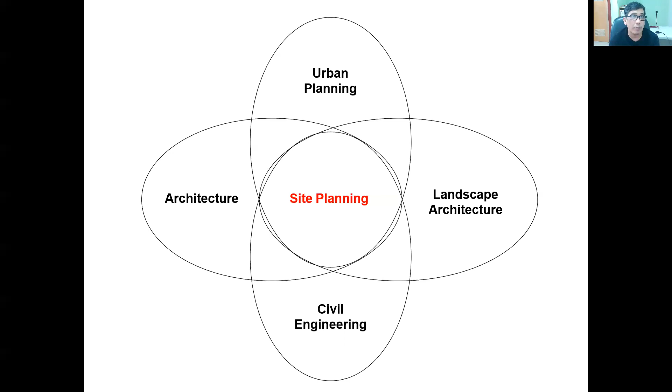So in our subject, we are discussing planning as an introduction, site planning and landscape architecture. We will be discussing a little bit of all of these topics that are shown on the screen. And we will be discussing first the site planning.

Site planning is the art and science of arranging the structures on the land and shaping the spaces between. It's an art of arranging uses of land linked to architecture, engineering, landscape architecture, and city planning. Site plans locate objects and activities in space and time. These plans may concern a small cluster of houses, a single building and its grounds, or something as extensive as a small community built in a single operation.

As you can see, in site planning, most of the time architects or engineers are given an opportunity to develop a vacant land.

One profession that is very involved in site planning is geodetic engineers, along with architects. Architects and geodetic engineers work together in creating large areas to be developed. The geodetic engineers establish the contour, the natural features or characteristics of the land, and the architects plan it according to principles or standards that are applicable for that particular location. Civil engineers do the design of the water, drainage, and electricity layout of a particular site.

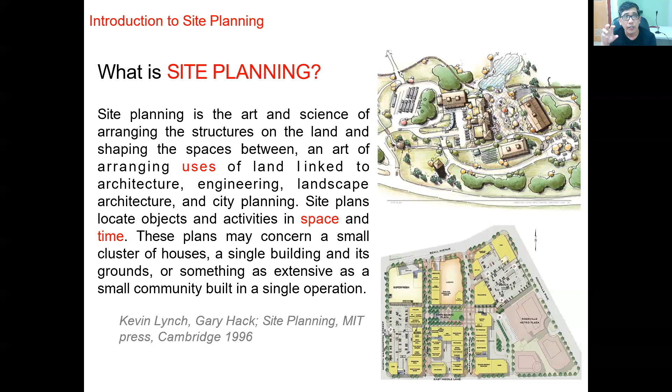A site plan consists of locating the different parts of the land that you will develop. You will show the building, the roads, the parking areas, the pedestrian paths, the natural or man-made features like trees, the landscaping, and where the service area and drop-off for building users will be. You will also show the property line, the orientation, showing the north-east-south-west symbol on the site, and showing the possible contour if you can show it on a site plan.

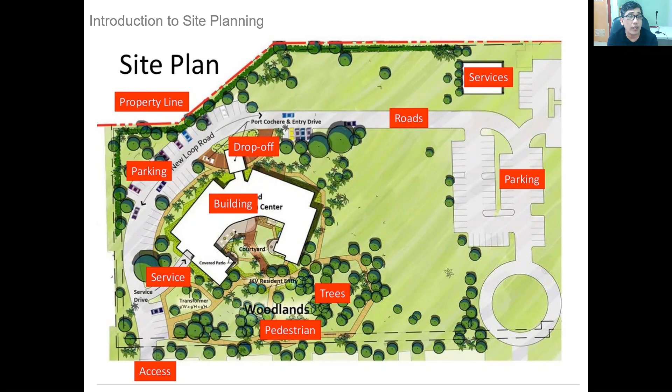In the site plan, some architects also create a site plan showing the ground floor plan. In this ground floor plan, you can see the perimeter of the building showing the immediate hardscape or landscaping around the building, the drop-off, and the parking areas. This is very important in presentation or in conceptualizing the flow of traffic, the flow of pedestrians, and the location of the landscaping on a particular site or building. So in creating a micro plan of each particular building, you can see and show this hardscaping around the building.

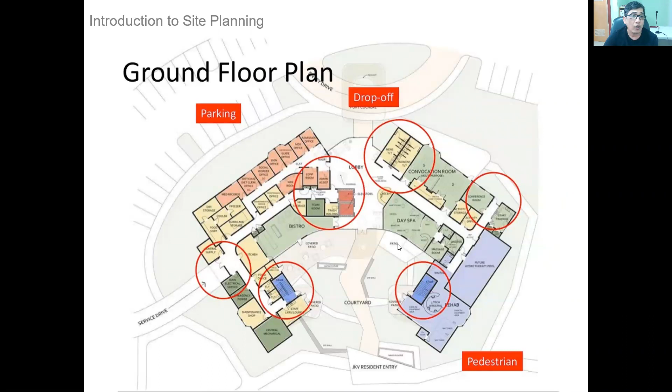On the upper floor, you can also see that the vertical transports are located in the same area, and it affects the configuration of the upper floor layout.

Most of the time when I'm planning a building or structure, I always think of the positioning of the fire exits, stairs, elevators, and ramps in relation to the ground floor up to the upper floors. In creating a plan, you need to orient yourself on where the stairs will be in relation to the site and how it affects the overall plan on the upper floors. So you always think of the three-dimensional massing of the building during the site development plan.

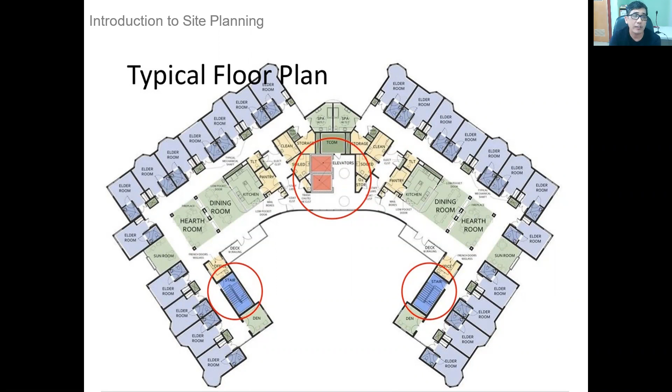This also shows the entrances of the building. This is a different type of building, I think this is a school. You can see there are elevators and entrances on different areas of this site, and it shows that you are providing pedestrian access to those entrances, as well as vehicular drop-offs if you need one. So basically the site development plan should address the needs of the building.

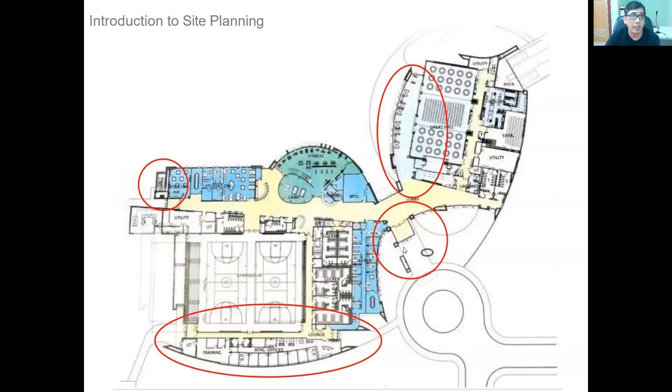So what is site planning? It involves the organization of land use zoning, access, circulation, privacy, security, shelter, land drainage, and other factors. It involves arrangement of compositional elements of landform, planting, water, paving, and buildings. It generally begins by assessing a potential site for development through site analysis.

Going back to this slide - site planning involves the organization of land use zoning. In case you have a large area where you will develop, you particularly zone activities on the site. You segregate activities that involve a lot of noise, activities that need quiet areas, activities that need a view, and activities that service the whole site. So you will be zoning the site according to the zoning, and also according to the land use.

If you are developing a bigger community, you will segregate the commercial area, residential area, and the area for industrial use. So those are the different zones in a macro site development plan or site planning.

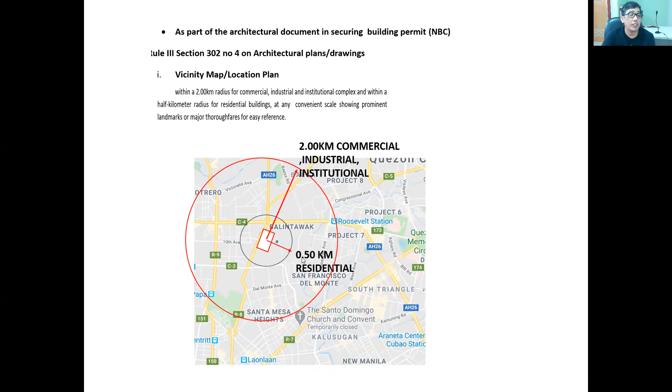So, parameters in site selection and analysis. Site analysis, in many aspects, is the most important step in a successful site design process. The purpose of site analysis is to gather data for preliminary planning,

to evaluate the site for compatibility with the proposed project or use, recognize concerns requiring additional study, and form an understanding of the administrative requirements of the project, such as building permit and approval.

This is the first step in creating a site analysis, site development, or site planning: create a preliminary site analysis. Gather the data that are available, the title, the contour map, and evaluate the site for compatibility with the proposed project or use, using the zoning map of the community or municipality to see if they will allow you to build a particular building on that site.

Recognize concerns requiring additional study if there are fault lines, water features, trees, or animals on the site that require additional study.

Form an understanding of administrative requirements of the project, such as building permit and approval. This pertains to the legal processes that you need to get clearance or a permit to build something on a particular site. Most of the time, you are being asked to secure an environmental compliance certificate in case you will be building a big building or developing a large area.

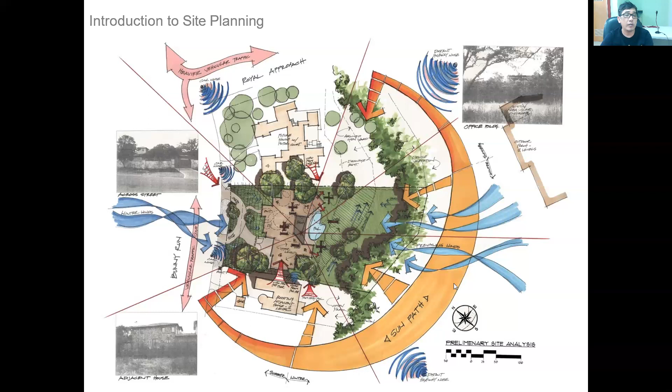Number one is orientation. You need to know where the sun will rise and set, so that you will know the orientation of your building. So, parameters of site selection analysis: you need to consider site characterization, which is a more detailed site investigation usually undertaken after some degree of preliminary site planning.

It generally includes geotechnical analysis of subsurface conditions such as depth of bedrock, depth of groundwater, seasonal high water table, and soil makeup. So these are the different considerations.

For geotechnical analysis, you need to make sure that you know the soil condition, what type of soil the building will be erected on, and what is the possible depth of your foundation for the building to stand. This is done by creating a soil analysis.

Another is to identify if there is groundwater on the site, and to know the seasonal high water table, or if there is flooding, you need to make sure you know the water table in case a flood will occur.

Another one is to know the soil makeup - what are the different types of soil beneath your ground. So these are the different factors that you need to understand or gather information on, so that you can start with the design of the site.

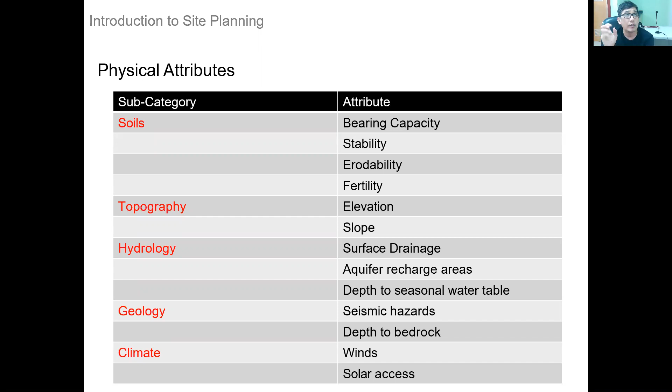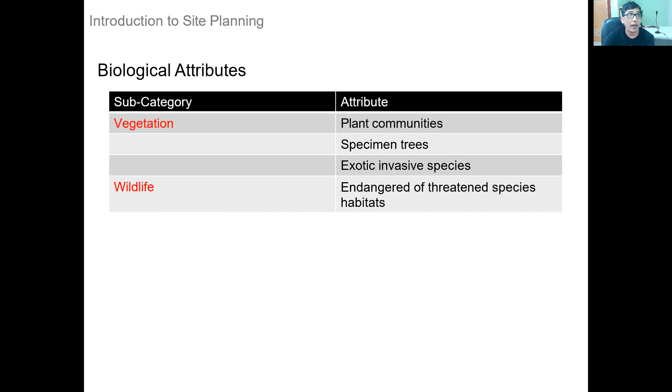The biological attributes is the vegetation or the plant communities, the specimens, the exotic invasive species - if there are exotic plants on site, or trees that cannot be cut off, and if there are endangered wildlife or species in the habitat, like birds, or sometimes deers, or animals that are on the site, you need to address these biological attributes.

The cultural attributes - this is the land use, the prior land use, what was it before. Sometimes you are encountering areas that are vacant, but after some evaluation or research, you will find out that there were previous buildings or previous uses of that area. So you need to make sure that you are researching the prior land use before starting to construct anything.

Land use or adjoining properties - what are the properties that are near or adjoining your lot. In terms of legalities, who owns that lot, if you have the title or you don't have a title of the lot. Another was the land use regulation, what are the regulations affecting your lot, easement and deed restriction. In terms of utilities, the availability of water line, electrical line, and sewer line.

So in preliminary site analysis, we usually seek where the electrical, water, and sewer lines are.

Another is the traffic volume or circulation - is it near a heavy traffic area, or are there available road networks connecting to your site? So those are the circulation considerations.

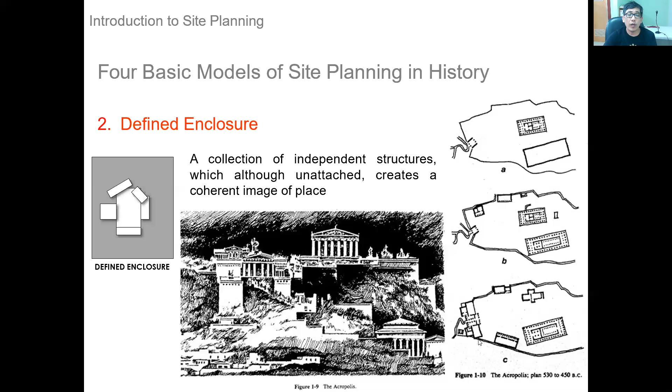This is also one of the planning models seen in history, where buildings enclose an area to create a space. This is what you call the defined enclosure. Here you can see buildings created around an open area - this is the Acropolis in plan, dated 530 to 450 BC.

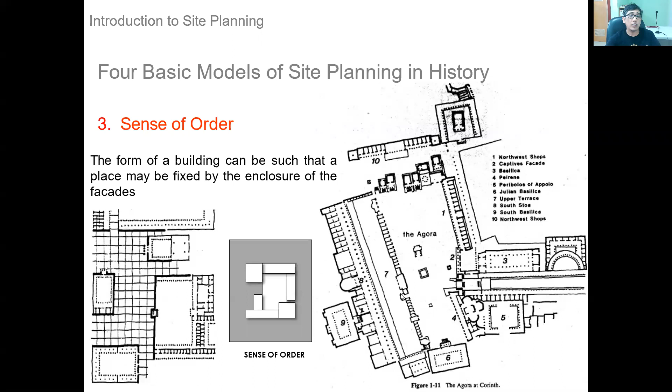Another is the sense of order, where the form of the building can fix the place by enclosure of a facade. This is the agora of Corinth. This is also the type of site planning used in the Intramuros area, called sense of order site planning - a type of planning where fixed buildings enclose an area in the middle.

Another is the axial form. Although the kinetic implication of the word path is somewhat contradictory, paths are nonetheless capable of forming coherent, meaningful images. This is what you call axial form - creating an axial orientation to a specific area, a symmetrical axial site planning. This is common in university site planning, like the University of the Philippines, where there is an axial plan orienting everything on the main axis, mirroring the images of buildings on the left and right sides of the whole campus.

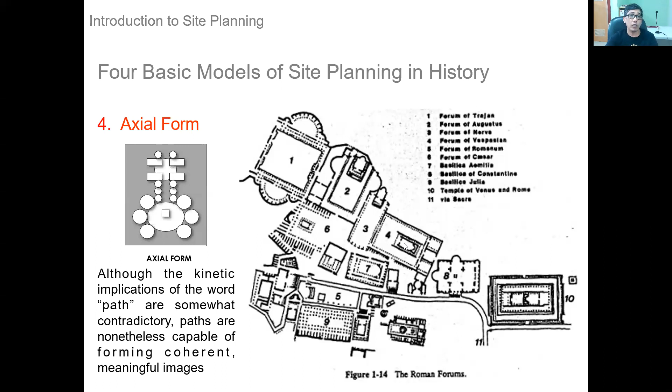The traditional steps of the site planning process are: programming and feasibility, site analysis, then design - conceptual design, schematic, preliminary site layout, preliminary site plan and design, final site plan, and then construction. This is the typical site planning process. We will discuss this further in future lectures.

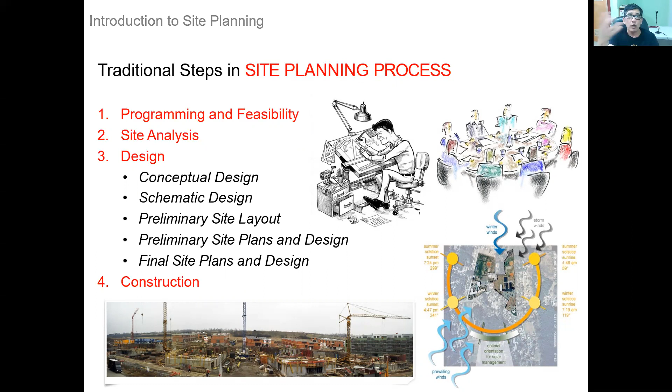Another part of site planning is programming and feasibility. The parameters to be considered are the user's needs, the project client, the resources available like money, financial and material resources, the land as one of the resources, the plan - what is the available plan you will use - and the location. These are part of programming and feasibility. We will be discussing feasibility study in the near lectures.

Another is the user requirements. To give you an overview: the vital supports, the sense of place, the good environment, the access, different types of users and models, the controls, and others.

The site selection considerations are the legal aspects, the values, the land use, location accessibility, site configuration, the physical characteristics, utilities, and public service. These are part of the site selection consideration.

The other part is the legal aspects - we have the title, which covers issues of property ownership, the surveys, easements and covenants, and the contracts and conditions. These are the legal aspects of site planning. You need to make sure they own the property or have the rights to build on it, gather the survey, create easements and covenants, and make sure the contracts and conditions are properly laid out.

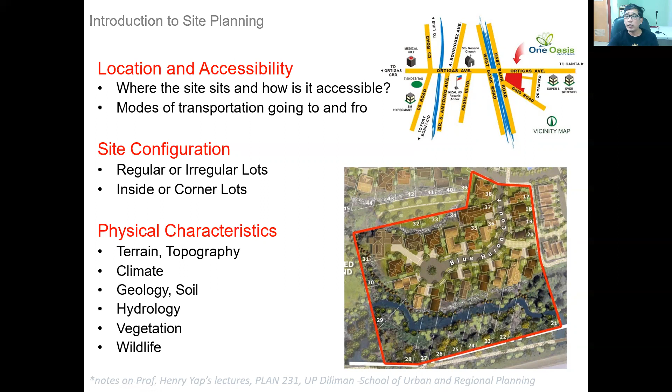So what are the site features? In the site features, you can see the ecology of the site, the type of the soil, the landscaping, the utilities that are available around the site. The landform, the human and vehicular travel around the site - this is also part of the site features that you will consider.

The climate, what is the climate on the area, on the community, or on the region? What are the noises or the air noise that will affect your site and the adjoining structure? If there are adjoining structures that are tall or small or vacant areas, you need to take down those of that adjoining structure.

So there are regulations that are specifically affecting the site planning. We have the area specific regulation, the subdivision regulation, city and municipal regulation, the provincial regional regulation. In terms of a national code, we have the medium-term development plan, or the national land use building plan, or the building codes.